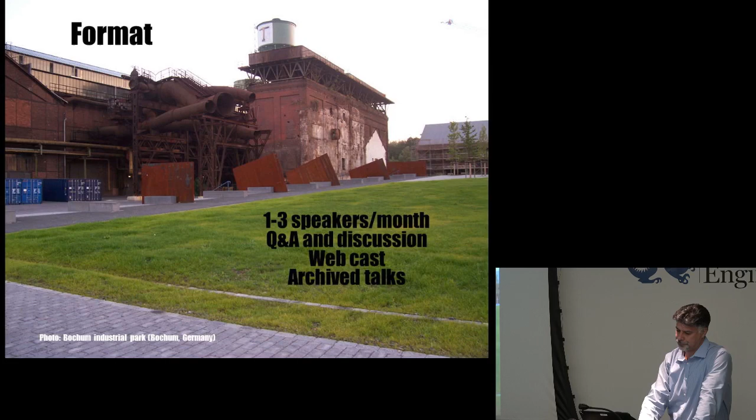So today's topic is focusing on green infrastructure in New York City, green stormwater infrastructure in New York City, and I'll talk about that in a moment. I'm actually listed as the presenter. However, the work that I'm going to present today is the doctoral research of Dr. Stephanie Miller. She got her PhD here at Drexel in my group and graduated last year. And she's now got a job working out in Colorado and was not able to make it. So I'm presenting two chapters of her dissertation work today, and I'll shift to that now.

So I should mention that the format for this presentation is two PowerPoints. Those of you who are joining online and who also attended the 2018 Low Impact Development Conference in Nashville, Tennessee last month have seen some of these, because these have been adapted from that presentation. So they're two separate conference presentations, and I'll give them back to back. The first presentation is focusing on stakeholder perceptions of green infrastructure in New York City, and this was a several-year effort that Stephanie undertook to try to understand how people in New York City see green infrastructure and the benefits that it can provide.

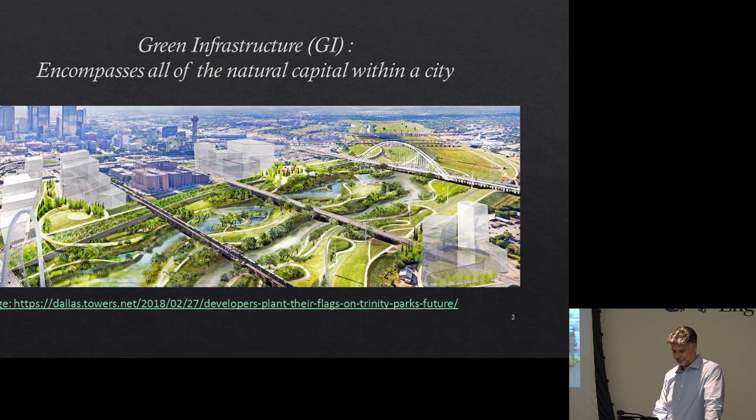So just by way of orientation, since this is green infrastructure, climate, and cities, people in this session have talked about all different types of green infrastructure, and of course, we do think of green infrastructure as encompassing all of the natural capital within a city. But the focus of this talk is specifically on green stormwater infrastructure. So this is a subset of all green infrastructure that is being sited and designed specifically to manage stormwater. And so a variety of different types of green spaces. These are mainly images from New York City, although one in Philadelphia, showing different ways that stormwater is being managed using green spaces in a decentralized way on public and private property.

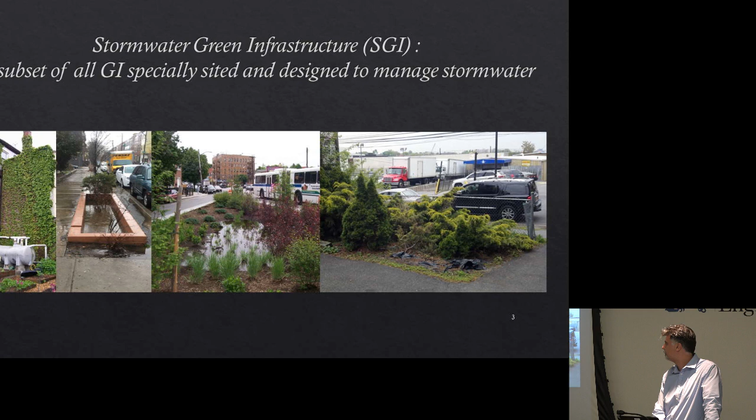So you might say, especially if you come at this from a government perspective, why do stakeholder perceptions matter, right? We're building these things, they're managing water. And I think there's a variety of reasons why perceptions matter, or at least why we undertook this study. I should mention up front, this study, although we're focusing on green infrastructure in New York City, was not funded by the City of New York. It was funded by both NOAA, the same source of funding for this seminar series, and the National Science Foundation.

But to a great extent, truth is perception, right? Or perception is truth. So how people see green infrastructure matters quite a bit, especially when they go back and talk to their elected representatives, or they report back to their supervisor if they're government employees. So the perception, what people see when they see these green spaces, very much influences the whole process that is involved in building green infrastructure in cities.

So the next thing is expectations, right? So stakeholders expect certain services from these investments. They expect to get something in return. And it's very interesting, having worked in various communities, is that what people expect from green infrastructure and what the expectations are of those who are investing in green infrastructure are not necessarily aligned. So, there could be an investment in green infrastructure made for a certain reason, and then the expectation from others who see this green infrastructure arriving in their community could be quite different. So,

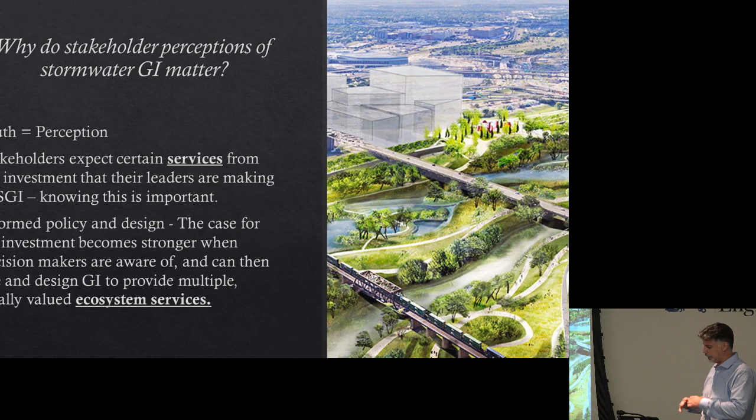this distinction is important. And then the third is sort of informing this alignment activity. So how can we inform policy and design with local preferences in mind? So if we understand that people would like to see this flavor of green infrastructure more so than that flavor, and in fact, if you make it this flavor, they'll be more supportive of the whole thing. That helps you to build support. So that's the framing for why we undertook this study to begin with.

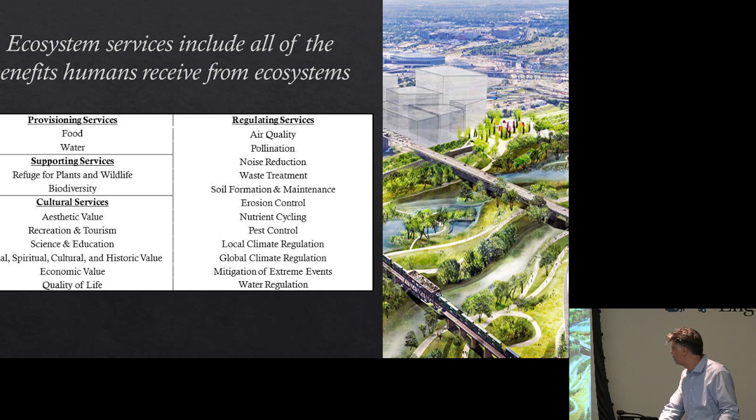So we are focusing on ecosystem services, and we probably all know this in the context of this seminar series, but ecosystem services refer to the benefits that people get from an ecosystem. In an urban environment, not all of the full suite of ecosystem services that are discussed globally are relevant. There are certain ones that are more relevant. In fact, Stephanie actually went through all of the literature on this and came up with a short list of about 22 services that we thought were appropriate to consider in the context of green stormwater management. In other words, services that could potentially be provided by green stormwater infrastructure in a city. And they fall into the typical categories of provisioning services, supporting services, cultural services, and regulating services.

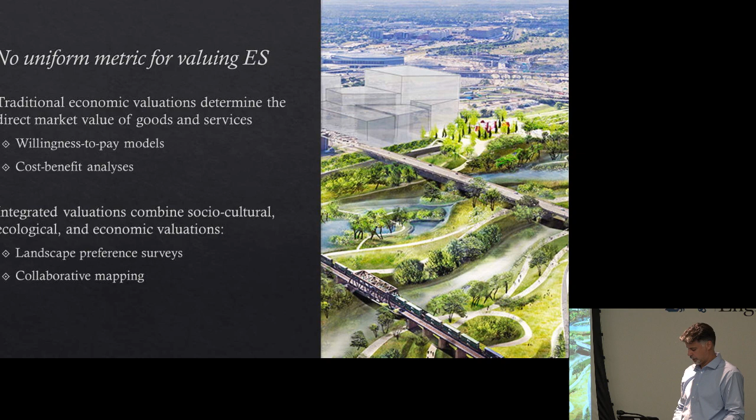And one thing that I wanted to also mention up front is that there is no standard way for trying to put a value on an ecosystem service. There's a lot of different approaches that are out there. We have these traditional economic valuation methods, willingness to pay, cost-benefit analyses that sort of zoom in a certain way on some services. And then increasingly you're seeing these integrated analyses like landscape preference surveys, collaborative mapping. These are more interactive environments where through interactions with stakeholders, you can get a broader perspective on this. But there's certainly no one right way for doing this type of a study.

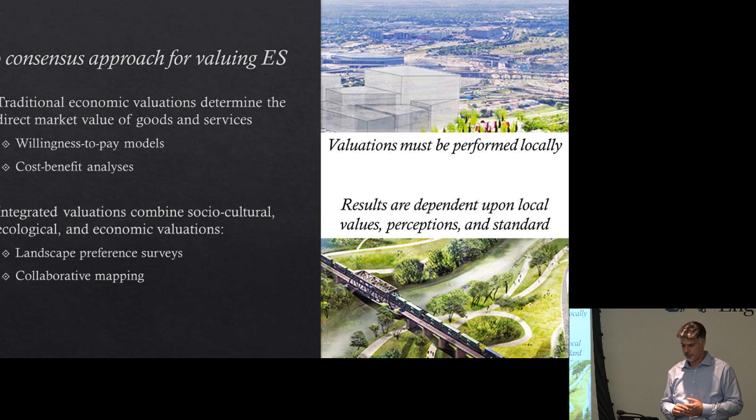In any case, you also can't easily generalize from place to place because the perspectives of different stakeholders differ from one another. And so these valuations need to be performed locally, and they're dependent on local conditions. So again, we're focusing on New York City. And this is just a preliminary attempt to focus on that second type, this integrated socio-cultural valuation. And we're focusing on ecosystem services in New York City's stormwater green infrastructure.

And so our goals were three. We wanted to determine the services that different stakeholders, and I'll talk about in a moment which stakeholders we targeted, value from different GI types. And then we wanted to contrast these different perceptions. And then we also wanted to compare perceptions with the best we could do in terms of objective facts. In other words, we looked at the literature and said, well, has it been shown that this type of green infrastructure can actually provide this type of service? Is it technically possible? And then if it is, do people see it? Do people appreciate that possibility, or vice versa? And then, again, we wanted to use this to try to tailor green infrastructure investments so that we're managing stormwater, but we're also helping to increase public acceptance, and that's more in the second presentation.

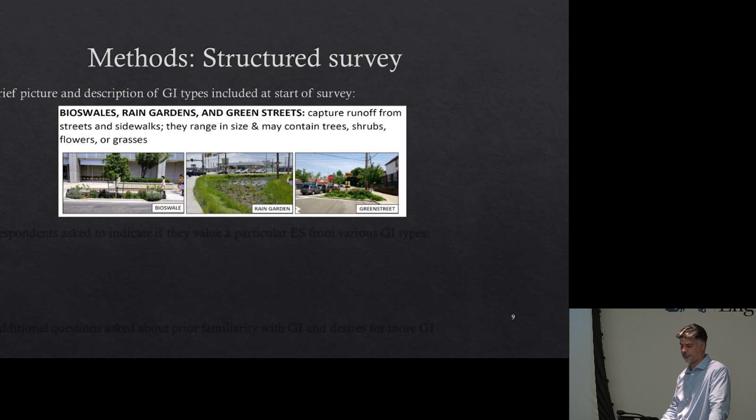So our methods included a structured survey. I should mention, before we created this structured survey, we did months of semi-structured interviews with experts in New York to try to design the survey itself. In the beginning of the survey, we showed pictures of different types of green infrastructure, and then we asked respondents to indicate if they thought each of these different services was provided by checking a box by the different types of green infrastructure. So we focused on 6 types of green infrastructure. We sort of bundled together bioswales, rain gardens, and green streets.

In New York City, green streets means these sort of vegetated green spaces in intersections, irregularly shaped green spaces that are built. Originally, the Green Streets program in New York City was an urban beautification program to take unnecessarily paved spaces and make them beautiful. Since the city started using green infrastructure for managing stormwater, a lot of those have been depressed and water's been sent in them. So that's one category. Then green roofs, street trees, community gardens that have a rainwater harvesting component, general parks and natural areas, and then the last are permeable playgrounds.

So what we did in this survey was we listed, so they provide desirable habitat for birds and animals. So we didn't use the word ecosystem services. We sort of boiled it down to something that people can relate to and said, do you think any of these things provide that service? And we went through that for all the services that I mentioned previously.

We also asked general questions, demographic information about the survey respondents, and tried to also gain some information about their familiarity with green infrastructure. So for statistical reasons, New York City has a certain population. We were focusing on the Bronx. We had a target study size of 384, and that was basically to get 95% confidence level and 5% confidence interval for the whole city.

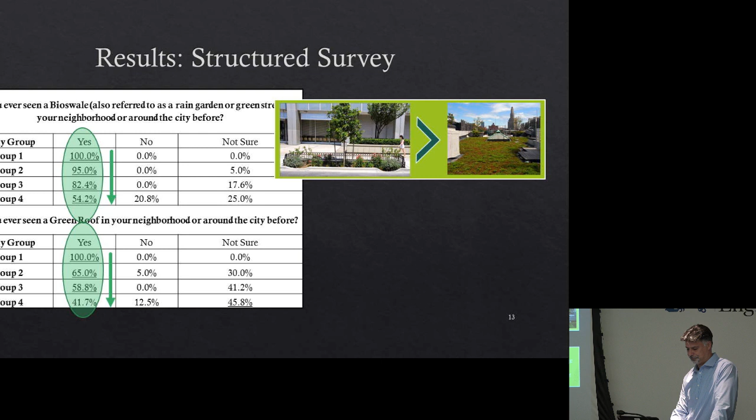So certainly, as you go from 100 to 41, 100 to 54, the less exposure you have, the less likely you seem to be to have observed or seen one of these features in your neighborhood. So, this was kind of interesting. People who work with green infrastructure generally have seen these features in their neighborhood more than someone who knows someone who's a park user or an average New Yorker.

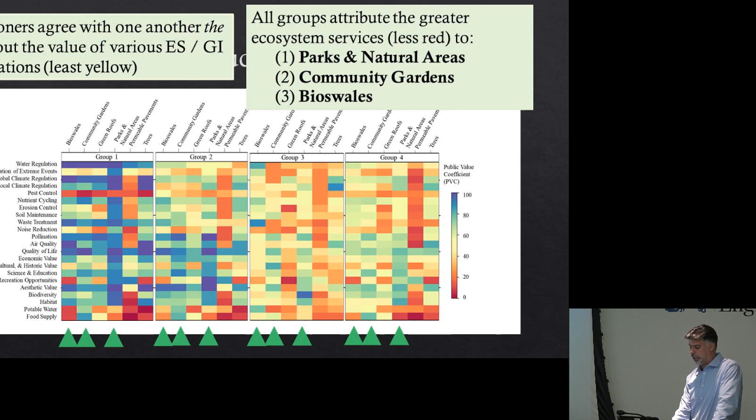Another way of looking at this is this same data. I should mention, we're calling this a public value coefficient. So it's a percentage, but it's a public value coefficient. So when I talk about PVC values, that's what I mean. So when we average all ecosystem services, in other words, go down the column, all of the services for the different groups, we see a few interesting things emerge here.

So one is the parks and natural areas are ranked number 1 if you look at all groups, followed by community gardens, followed by bioswales, then street trees, then green roofs, and then finally permeable playgrounds. So permeable playgrounds, perhaps because most of what is happening is underground, are sort of the least appreciated, and parks and natural areas seem to be the most appreciated.

Sorry that when I moved this to a different computer, these things shifted.

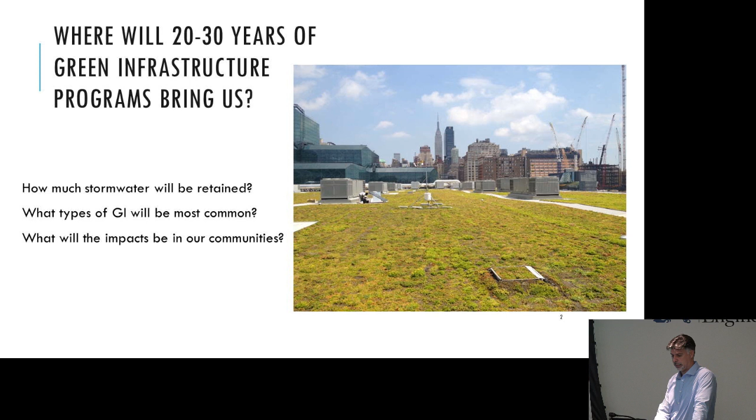Do we know? We're all investing in green infrastructure now. Do we know in 20 or 30 years where we're going to be? Do we know how much stormwater will be retained? Do we know in the end, when all is said and done, what's going to be the most common type of green infrastructure that we're going to see around us? What types of relationships will we have in our communities? How will people be interacting with these things? And I think what we believe is that the answer is still unknown, right? There's so much uncertainty built into this thing that we're not exactly sure.

And so we saw a value in developing a stochastic model, so a model that allows us to look at a whole bunch of different combinations of things to see where we might be. So we know a few things about what the key drivers may be. So we know that institutional constraints are significant, right?

So you can't just expect the Parks Department or the Water Department to be able to do anything anywhere. There are all kinds of issues associated with where a government agency can work and what resources it has available to it, and what sort of legal constraints there are on what it can and can't do.

We also know that community response or perception matters, right? And in some cases it can be favorable. The community can be very, very happy that certain things are happening, but if you're in the opposite situation and the community is reacting negatively to something, they can also influence policy and slow down or modify the way that this policy is being implemented.

We also know that there's a lot of heterogeneity. There's a lot of things that vary physically, but we made up this word spatio-temporal political, right? People in one place may support one thing at one time, but then at another place and another time, they won't support that, and you can't necessarily predict how those things are going to evolve over time.

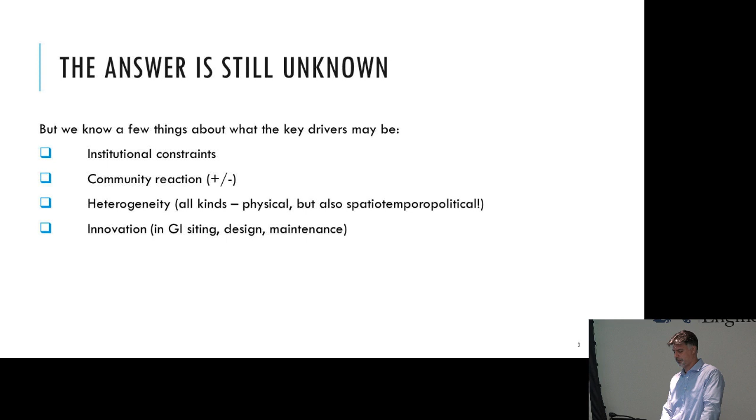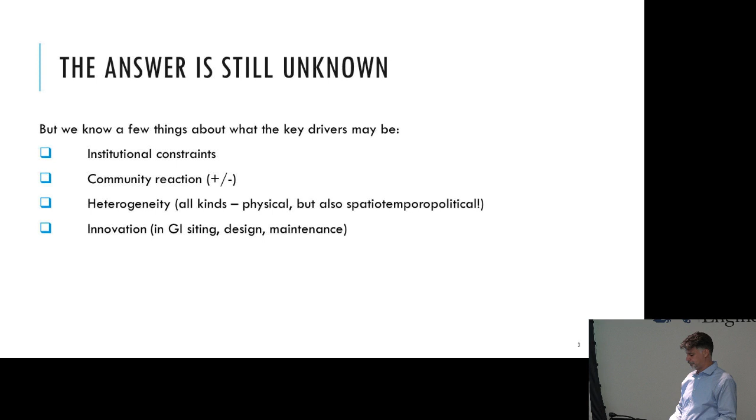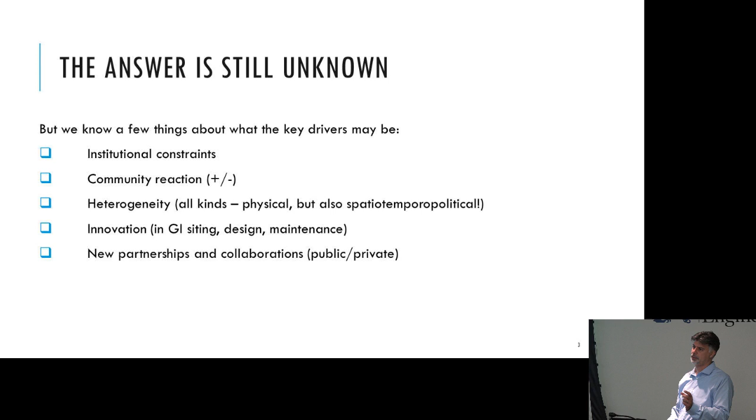There's also a lot of innovation happening in green infrastructure right now as we speak. People thinking, even right here in Philadelphia, about new ways of integrating green infrastructure into environments and new research on how to build the most effective systems. And then we don't know much, but we know that partnering and collaborations are going to be increasingly what we need. Between public and public, different agencies working together, between private and private, and public and private.

The problem is that none of the tools that we have available to us for modeling green infrastructure actually allow us to look at those drivers, right? So this is being mean. EPA SWMM, which is sort of an industry standard model that's used by cities to predict, if I have this much green infrastructure in an area that looks like this and I subject it to this rainfall, this is how much runoff I'm going to get, this is how my reduction in CSOs is going to be.

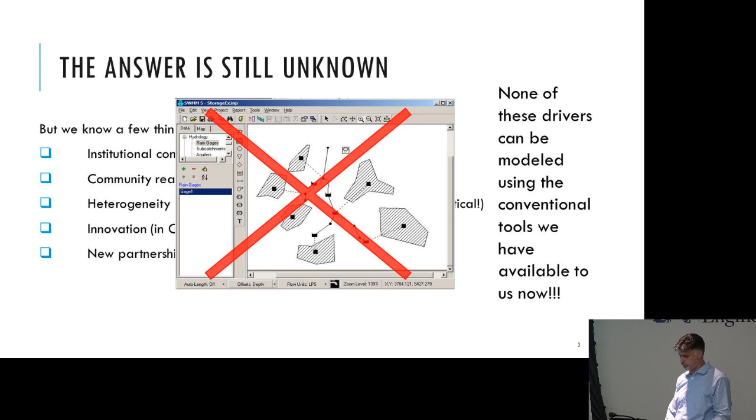But you have to sort of jump to those places, right? You have to construct the model for that future period. But the process of getting there is one that involves all these other dynamics, and we don't know. So we could create an infinite number of models of future situations, but that's time consuming and resource intensive. And so what we wanted to do with this research was to develop an agent-based model.

So agent-based models are kind of like SimCity. You develop a game, you put the agents in the game, you decide what the agents can perceive, what they can do, what resources they have available to them, and what is impacted by those actions. And then in agent-based modeling speak, you watch patterns emerge over time, spatially and temporally. So you put the agents into the environment, you design the environment, you design the agents, and then you allow things to interact, and then patterns emerge.

So agent-based models are used in lots of different contexts. People have looked at them in rural environments. There's been research on the Anasazi Indians and the Bali water temples, and lots of economic studies have been done, studies in the stock market. So there's lots of different ways that people use these. They're multidisciplinary, they're multi-actor, they're multi-domain. So all the things that, say, a SWMM model or a hydrologic model is not.

And one of the main uses of them, since by adding all this complexity, of course, you're getting into areas that are not well understood. And so we tend to use agent-based models. We run them thousands of times, and we allow stochastic things to happen lots of different ways, and then different patterns emerge. And we can use them to predict the outcome of different policy decisions, to evaluate the influences on decision-making, to explore socio-ecological linkages, given all the different perturbations of the drivers that we've built, customized into the model.

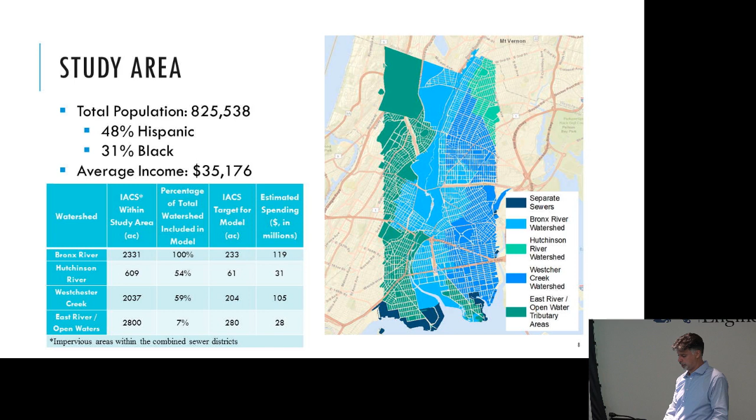And then the spending. We estimated the spending based on the amount that green infrastructure has been costing to date. So we took per greened acre based on the last few years of data, and also based on projected budgeting that the city has done over the next 20 years. We know more or less how much money they're going to be able to spend. So it's constrained economically is what I wanted to say there. Obviously I could talk for 5 hours about the model. I'm not going to do that.

And then each of these passive spaces, there are different decision pathways. So like if you look at the streets and right-of-way, a specific patch of street could become a bioswale, a tree pit, a permeable pavement, depending on the decisions of the active agents who operate on streets, in this case the DEP and the Department of Transportation. So that's generally the types of agents that we had to develop rules for, and then the rules impact those passive spaces.

The model also has these global influences built in. So, institutionally, we didn't allow green infrastructure to happen in places where it's illegal or where other factors would never allow it to occur. So how, what, and when GI is installed was realistic based on institutional constraints that we learned from our semi-structured interviews. Then there are monetary constraints, so there's only so much money that's available for each year. The yearly spending is based on the real spending that happened between 2010 and 2016. So we constrained the amount of money that can be invested.

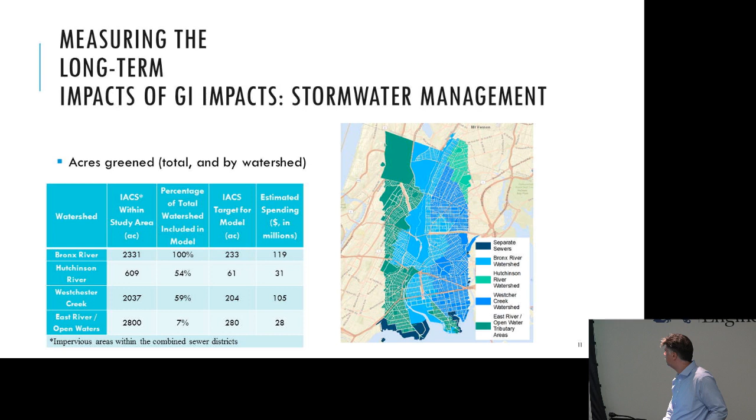So we took advantage of New York City's existing work here on economically valuing co-benefits and built that into the model. So when a particular type of green infrastructure provides one of these services, we track monetarily the dollar value of that service. And then finally, the public value, we looked at the Bhutan Gross National Happiness Index. So the country of Bhutan looks at happy people.

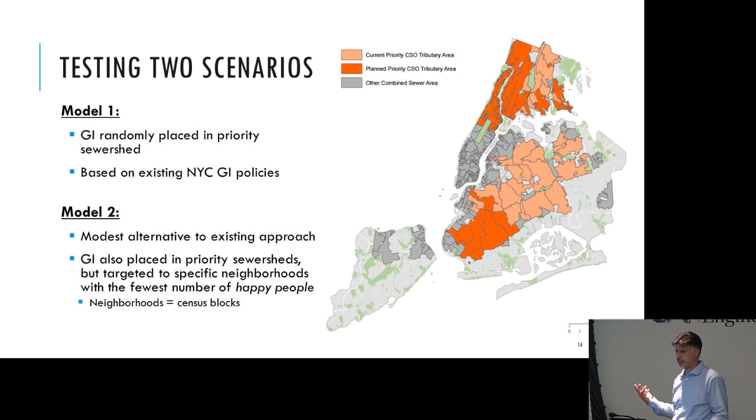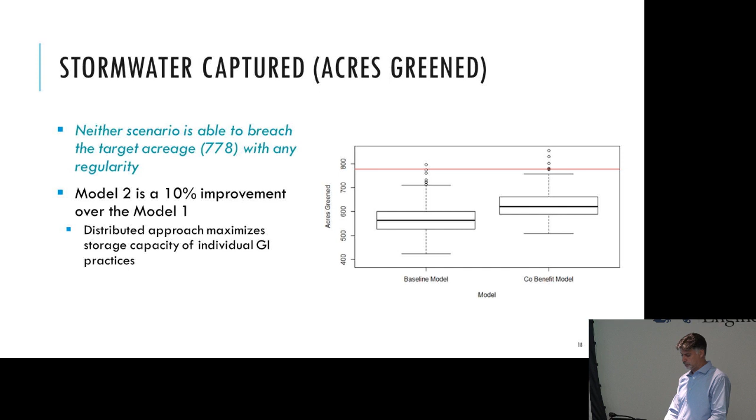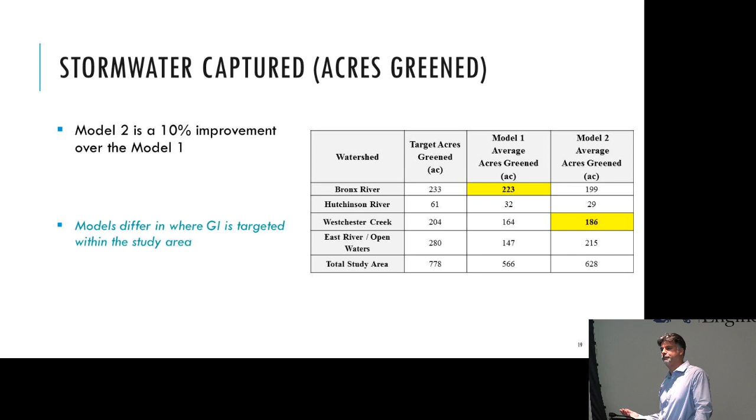So here you can see that broken down by sub-watershed. So Bronx River, Hutchinson River, blah, blah, blah. And you can see in Model 1, it really maxed out. The top priority in this was the Bronx River watershed. It's an impaired river. So you got close to the target, 233 in the Bronx River, but you fell short of the target in the other watersheds. Whereas in Model 2, by trying to make more people happy throughout the Bronx, you distributed your investments in the different watersheds. One spatial implication of this is that you're distributing the investments in different watersheds simultaneously.

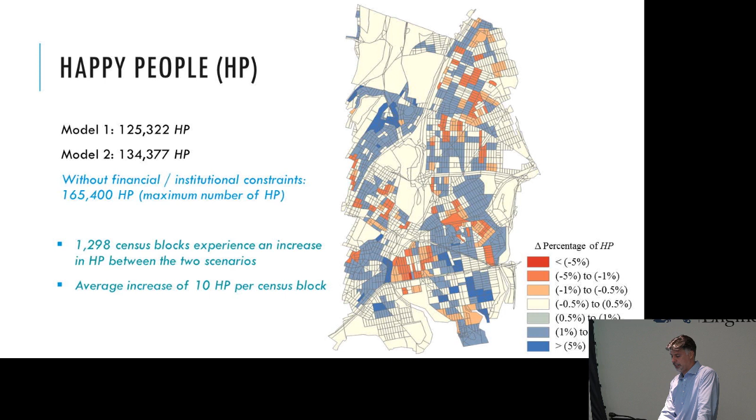So we did this all at the census block level. So there were about 1,300 census blocks where at the end of Model 2 there were more happier people. An average increase of 10 happy people per census block. So think about the block where you live on. If 10 people were happier, I don't know, maybe that would have an impact on your life. But it certainly suggests that we can maximize the public value of green infrastructure if we think strategically about how, even within the most sensitive watersheds, we implement our investments.

So conclusions here, at least in this watershed, and the level of funding that has been invested to date in green infrastructure, it looks likely that there won't be enough money to get to the stormwater capture goal. And I think this is nothing new. Cities like Philadelphia and New York know that going further and further in their program, there's going to need to be more private property activities and more cost sharing, more partnerships. So that's not necessarily new, but it sort of emerges clearly from this modeling activity. The city will likely need to encourage private property GI, and there's a lot of other people who've said this.

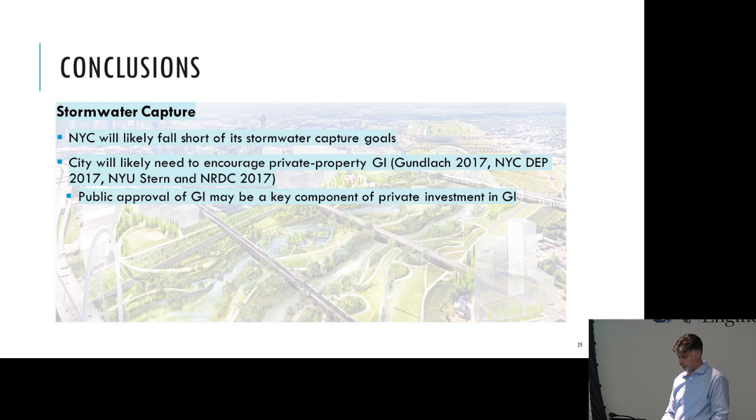In New York City, there was a report done at NYU, collaborating with NRDC and others. But then, and this was the question that was made earlier, public approval of GI may be a way of fostering that private investment that's needed. And so that's where this approach of thinking about the stakeholder expectations could potentially come in handy.

So the monetary value of the co-benefits is insufficient to cover the upfront or ongoing costs associated with GI. So we don't think that co-benefits should be used to justify the cost of GI. It should just be looked at as extra value. If you do this and the cost justification compared to a tank or a tunnel is in your favor, then you get this stuff for free. This is extra value you get. But it's not going to pay back the initial investment. Both models result in more than 125,000 happy people.

These are underestimates. We used certain figures, like how you may take a bus to work, and on your way to work pass a rain garden and think it's pretty. We didn't take that into consideration. We only looked at the stuff that you see on your block, and then for the parks, the number's not coming to me right away, but there's some work that's been done on how far people will travel to a park. So we used those distances. But in general, we're conservative in terms of the exposure. So these are conservative numbers.

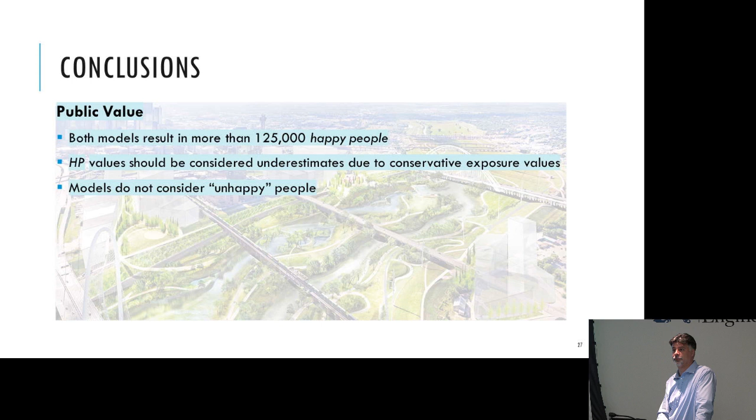I do want to point out that we did not consider unhappy people. So there are some people who are unhappy about green infrastructure. They don't want to have to rake the leaves. They don't like to sacrifice part of their park for a rain garden. They want to have barbecue pits. We didn't consider that. So, technically, if we were to continue this work, we might want to look at that. But we'd have to do more surveying to find out what people don't like about green infrastructure.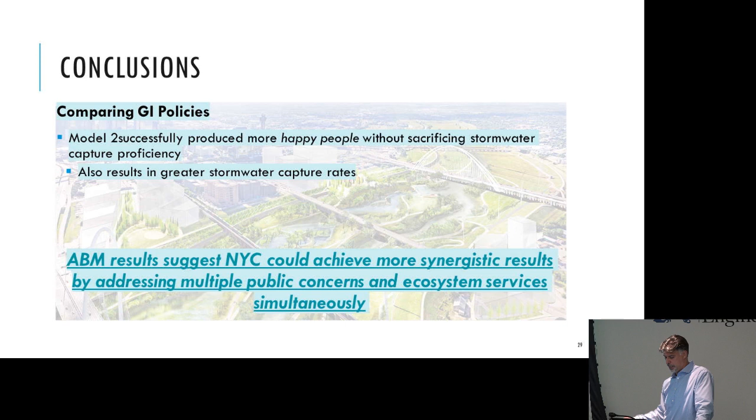So Model 2 successfully produced more happy people without sacrificing stormwater management. In fact, we captured more stormwater. But the results suggest that New York City could achieve more synergistic results by thinking simultaneously about stormwater management and public values. And that's where we think it would be interesting to see green infrastructure go at a national level, as we sort of get out of this initial pilot phase. We are out of this pilot phase of green infrastructure. If this program is to continue, that seems to be what's necessary. So that's the second presentation. Happy to take questions on this.

There's an online question. Yeah. So people are asking, can you speak on the so-called co-benefit of property values over a longer term horizon, where green infrastructure intervention may lead to resident displacement? So in the longer term, a different population might benefit from green infrastructure. Well, so the question, as I understand it, is about gentrification, right? Green gentrification. So if you green neighborhoods and make people more happy because you've improved their park, do you also simultaneously move them out of the neighborhood, because the property values go up and they can't afford to live there, and then people move in who have more economic means?

That is certainly something to consider, and not something that we were able to build into this model. We did try to do that in a previous agent-based model that we looked at in Philadelphia, but it's really difficult to predict the demographic impact in cities over time, because it's influenced by a whole bunch of factors that are above and beyond what could happen with green infrastructure. But I certainly do think that's something, especially in a place like the Bronx, where a lot of the residents live in renter-occupied units, as opposed to places in Philadelphia where they're homeowner-occupied units. There is that chance.